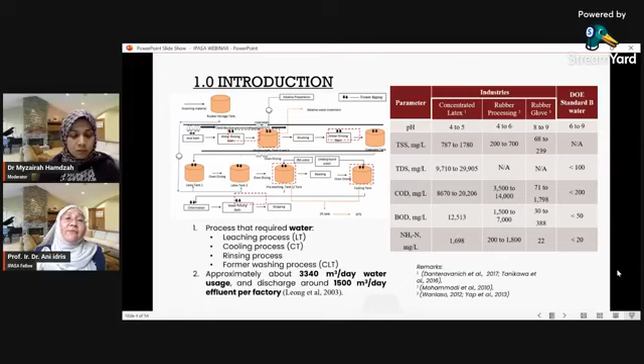Then they go for oven drying. Then they go into another latex tank for the second coating, and then only they go to the third tank here, whereby you have the pre-leaching.

In other words, they have to make sure that all the other unnecessary sensitive proteins are being leached out from the gloves, so that you will not be affected. Though some people are very sensitive to some of these proteins, they make sure it's leaching. The whole leaching process takes place, and that involves water again.

Then they go to another process of beading and so forth, and the last process also involves the rinsing of the gloves and also the dismantling of the gloves from the former.

So we can say that the process involves about 3,340 meter cube per day of water, and in fact they're discharging about 1,500 meter cube per day of water into the system. So the amount of water used is extremely huge.

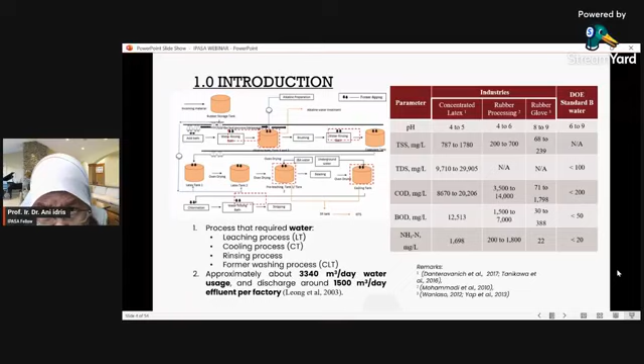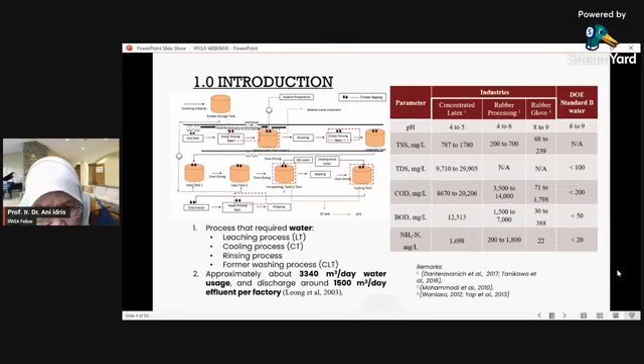And we can see here the kind of wastewater that we have from this rubber industry: the pH is about 8 to 9, and you're talking about a TSS of about close to 200, ranging 68 to 239, and the COD, which is very high, is about 1,700, and also the BOD exceeds 388.

So all these parameters have to be removed before it is discharged into the drains, so as to meet the DOE standard B. We're not talking about standard A, we're talking about standard B.

So the aim, and currently they are using the standard kind of processes used in any manufacturing process. Next slide please.

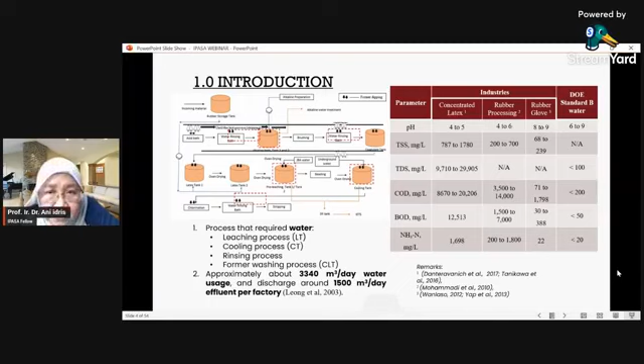Our intention here, when we go to the company to solve the problem, is to introduce to them our nanofiltration technology, which involves a nanofiltration membrane that is very capable of removing all the proteins and all the other particles. And then what we get here is the clean water.

So you have this effluent here, it passes through the membrane, and then you get clean water down here.

And as we know, most membrane systems are very energy efficient. They're eco-friendly, they are time-saving, can be operated easily, have high rejection rates of small molecules, and produce very clean water. But the challenge here lies in the prevention of fouling onto the membrane, and that's one of the biggest challenges we actually have to solve.

Because they have tried using an ultrafiltration membrane, whereby the filtration only runs for about 8 minutes, and then they have to do backwash for 30 minutes, and they have to repeat the whole cycle again.

And they actually tried to put a screening process before the ultrafiltration process, but basically even the screeners get clogged after some time. So the problem now is that even if our nanofiltration works, another great challenge is to remove the latex before entering the nanofiltration membrane.

And we want to use a very simple process without using any chemicals, no coagulation process, no precipitation process. That is what we are trying to do. Okay, next slide please.

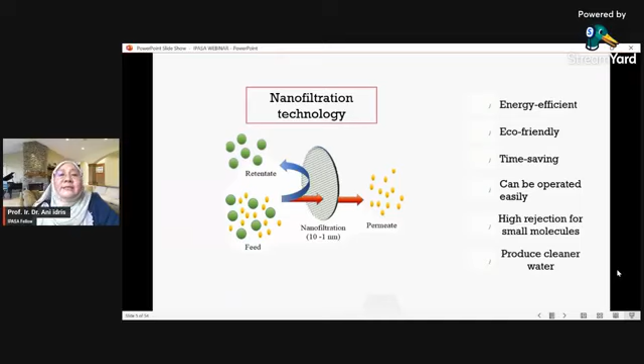So the problem statement, as we know, is that we know the problems that the wastewater produces. Basically, it's drained off, and we want to make sure that when it drains off, it meets standard B, and that some of this water can actually be used back into the process, so much so that it can even save water for the company, and also save money.

So we know that the membrane process can remove the latex, but the question now is what pre-treatment process is suitable, so much so that the latex can be removed at least 50 to 60% before entering the membrane process. So that is going to be our challenge. Next slide please.

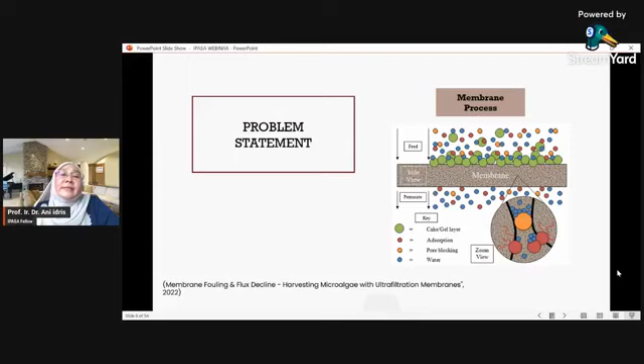Our research significance is that we wanted to come up with a pre-treatment process that is capable of producing cleaner water. It's a very simple pre-treatment process that does not use any chemicals, and we want to integrate this membrane process with the pre-treatment process.

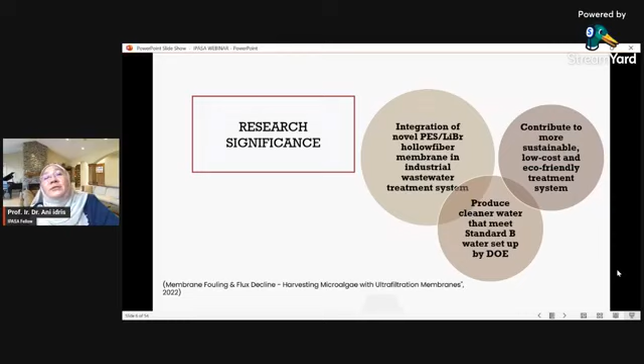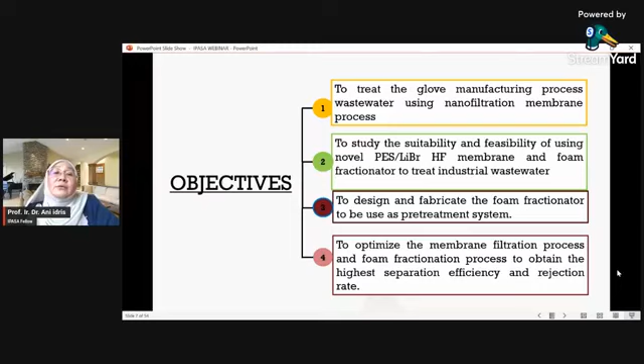Why do we want to use a foam fractionator? Because a foam fractionator involves the use of air that can carry out latex flotation using a simple flotation process that will float the latex and fine particles up onto the tower, and then you collect the clean water at the bottom of the tower. So this is our methodology.

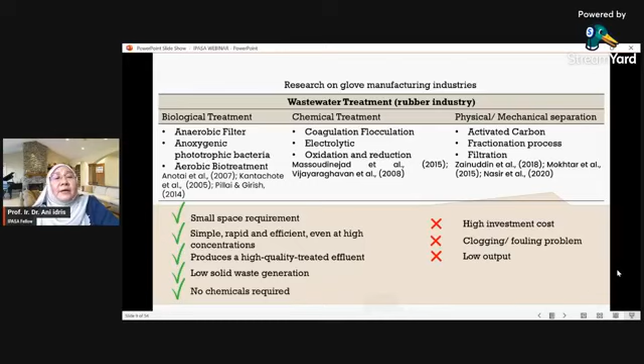I think I can omit the literature review. The current process used by most industries in the rubber industries includes coagulation, flocculation, electrolytic oxidation and reduction, activated carbon, and fractionation processes. They have a series of processes before they come to the final membrane process, and some of them don't even have a membrane process. Some use an anaerobic filter or aerobic biotreatment, but that process is very lengthy, time consuming, and involves high cost. Companies want something quick to solve the problem.

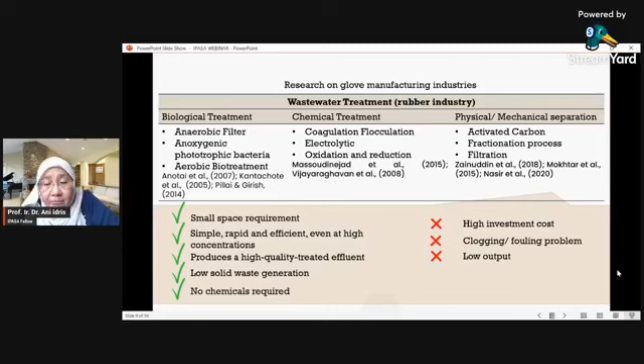We have our own hollow fiber nano membranes which we fabricated. The size is about 2.8 kilodaltons with a nano size of about 0.35 nanometers, and it's able to remove 77 to at least 80% of turbidity. It has the capability to remove about 50 to 60% of water hardness, and it's capable of reducing BOD by 70 to 80%, and also COD.

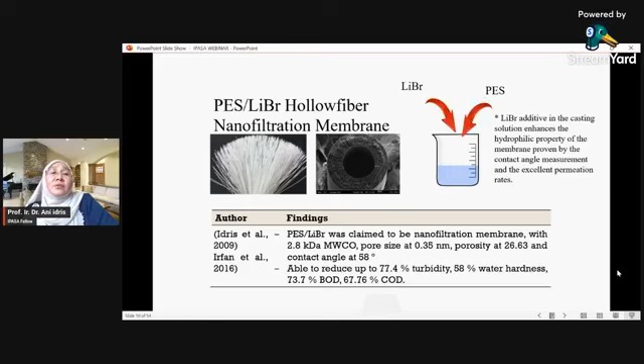Now the next thing is we are thinking of a foam fractionator. Why a foam fractionator? Because in this process we want to make sure no chemicals are added in. So what we did was pump in the feed inlet using a centrifugal micro bubbler pump. It's a very unique pump—when the feed comes in, it comes in the form of bubbles. Upon formation of these very small, minute bubbles, it collects all the latex in the feed, and the latex floats at the top.

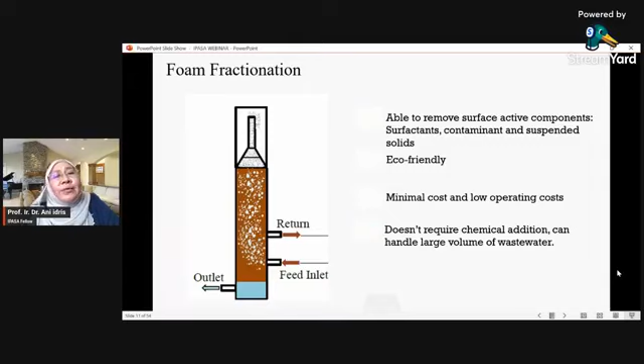In our methodology, the first part of the experiment is to get samples from the industry and use our small lab-scale systems to see whether the idea put forward works or not. In order to know whether the idea works, we have to run chemical experiments to test the water, and also check the flow rate of the water coming out, to see whether it's reasonable or not.

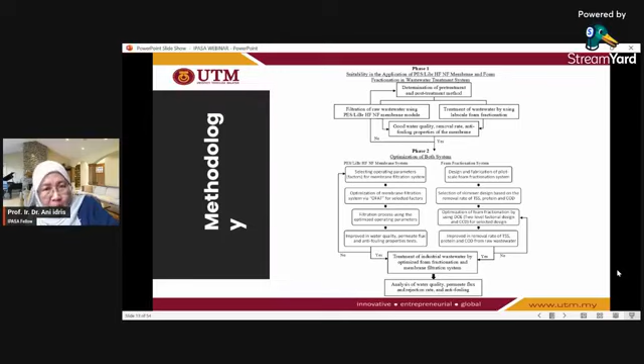If it's successful, then only do we go to the second stage of the process, whereby we optimize this small scale system, so that we can then go to the final stage of upscaling the whole system. So what I'm going to do now is explain our small system first.

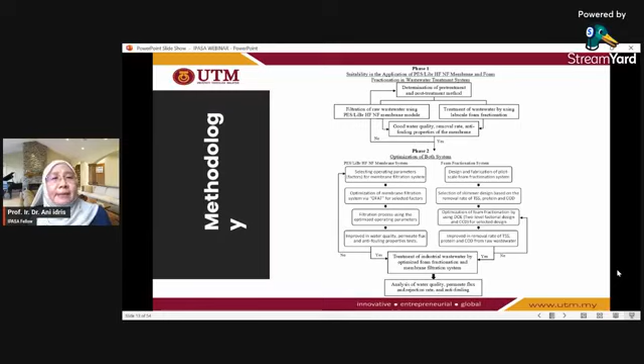But we know that if you were to use this membrane directly, it will get fouled within 30 minutes, and then we have to stop and do back washing, and repeat the whole system, which shortens the life of the membrane considerably. So what we did was fabricate a very small scale foam fractionator, about 100 centimeters in length and about 30 centimeters in diameter.

We analyze the water from every single stage of the process. We see what happens when we put the effluent directly into the membrane, what happens if we put it directly into the foam fractionator, and what happens if we combine the two systems together. That's what we did.

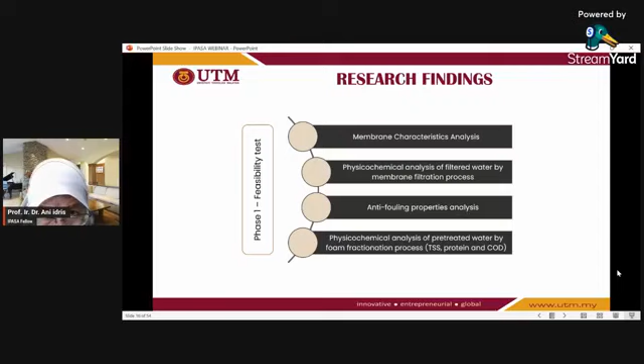Our research findings show four things we did. We characterized our membranes, because every time we fabricate them we need to characterize them to make sure they are the same size we specify. We also did a physicochemical analysis of the filtered water output from the membrane, and checked the anti-fouling properties of the membrane, whether the fouling is reversible or irreversible, and the total fouling properties.

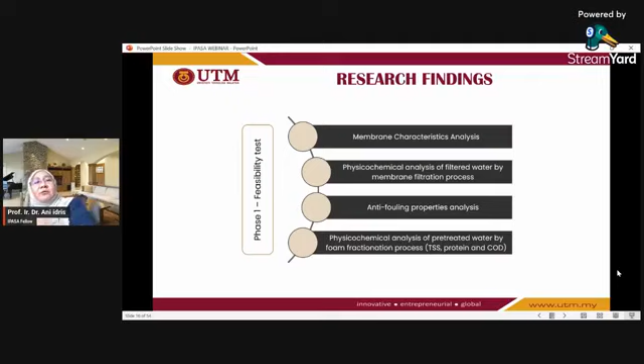We also analyzed the water we produce, one from the membrane without passing through the fractionator, and one after passing through the fractionator process.

When you talk about nano, what is the difference between nanofiltration, ultrafiltration, and microfiltration? Just a brief explanation for those not well versed with membranes: there are many materials that make membranes, we have polymeric membranes and ceramic membranes. The current system at their plant was a ceramic membrane, which fouled very easily. Our membrane is different, a hollow fiber polymeric membrane in the nanofiltration range. You might have heard of ultrafiltration and microfiltration membranes, which have a larger pore size.

Microfiltration membranes have the largest pore sizes, and ultrafiltration membranes are smaller. Nanofiltration is actually a size in between reverse osmosis and ultrafiltration. The size is not as small as RO, but it's smaller than ultrafiltration. Just an overview of membranes.

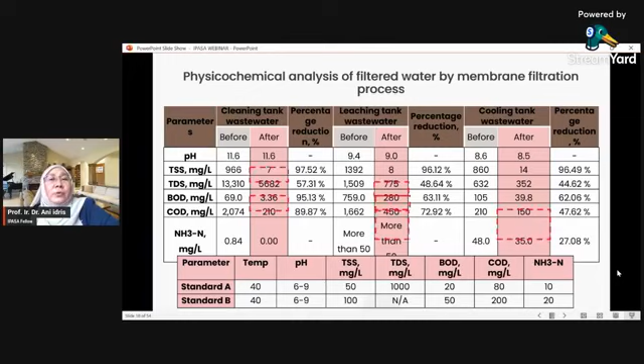Okay, so what we did is we know that if we're going to use it directly for the filtration membrane, we're going to clog the whole membrane very soon, very fast. So what we did, we are interested to find out what happened if we pre-treat the whole thing, if we use a pre-treatment process.

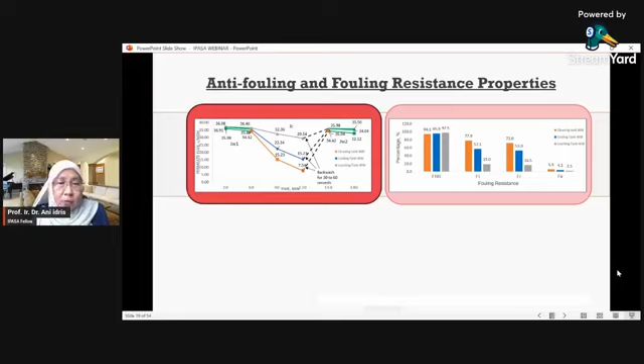So we find that this fouling process must be reduced. But this is the typical kind of results you get if you pass the effluent directly into the membrane process. So we know that we have to reduce the fouling.

So let's check onto the foam fractionator results. Next slide, please.

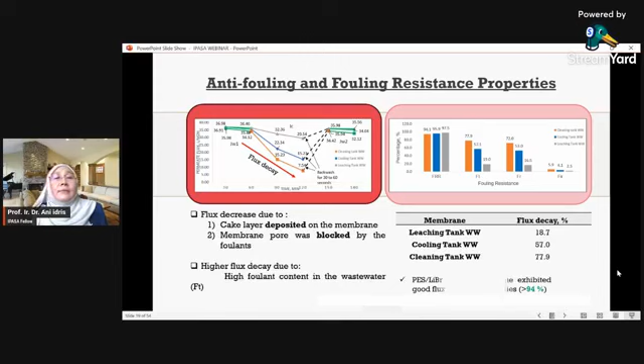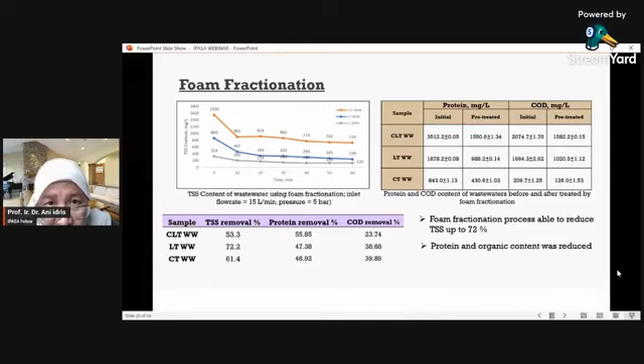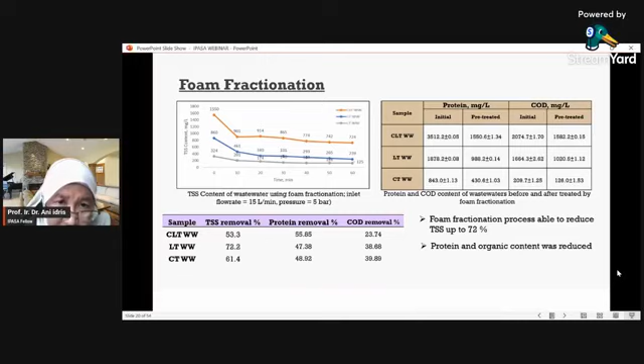These are all for the different points—different wastewater from the cleaning tank, from the leaching tank, and from the cooling tank. So you can see there is about 53% to 72% removal for the TSS, and the COD removal is about 23 to 38%. So our idea to use the foam fractionator to remove as much TSS seems to be working quite well.

So now what we do is we combine the foam fractionator and the membrane system to see what the results are like. Next slide, please.

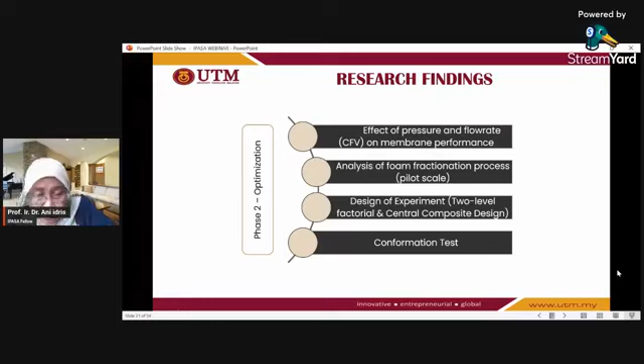So now we know that our idea of using a foam fractionator works. So what we do now is we optimize our foam fractionator, by varying the pressure and the flow rate, and then we also analyze our foam fractionator process. We make some adjustments to the foam fractionator in terms of the water inlet point and the water outlet point. So we do some design of experiments, statistical analysis, to actually optimize our foam fractionator.

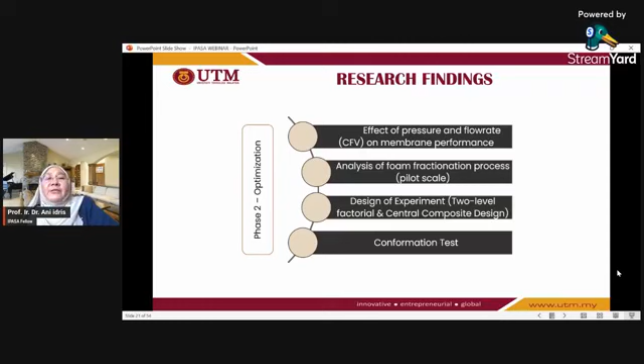Next slide, please. And of course, we measure the effect of pressure also. So these are some of the parameters that we actually vary. For example, our pressure—our membrane is a low pressure membrane, so we don't actually use very high pressure. Our highest pressure is about 3 to 5 bar. We don't use anything more than 3 bar.

But we tried 5 bar. The results for 5 bar and 3 bar are not much different. So we decided that 3 bar is actually one of the best conditions to use for the membrane.

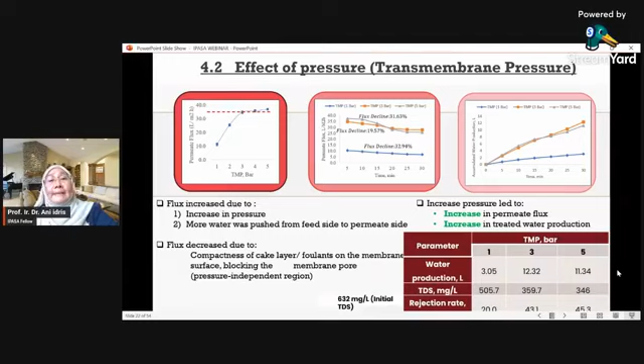Next, please. Of course, we also check on the cross flow velocity, and we vary the cross flow velocity so as to get some of the optimum points. I'm not going to go into detail as to what kind of statistical analysis we use—we use design of experiments. Next slide, please.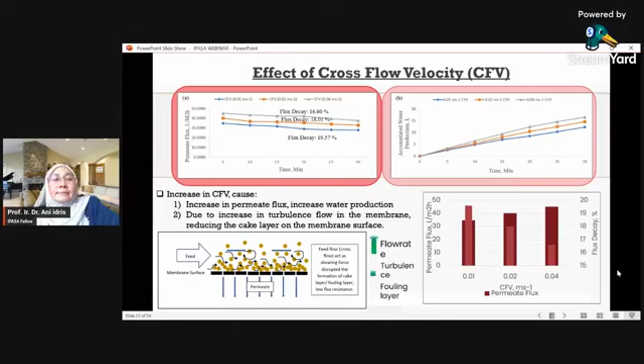And then we also optimize the foam fractionator. Next slide, please.

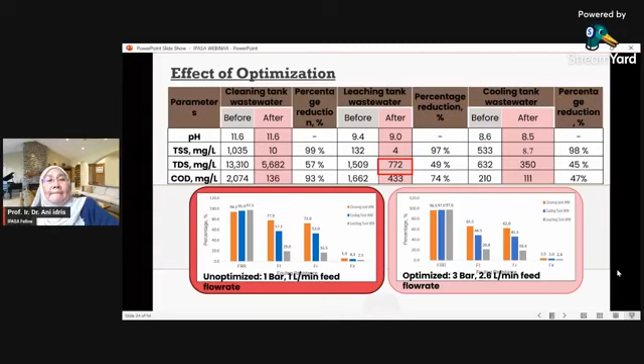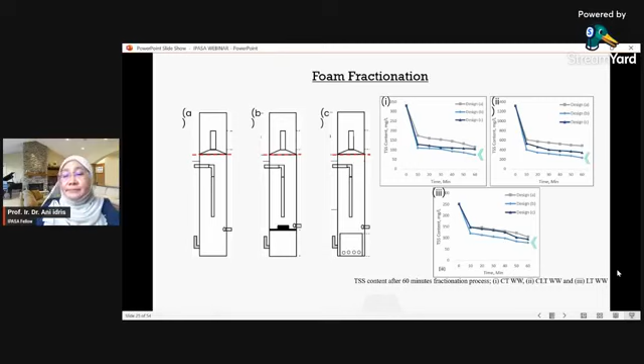So the results then, I think, of course I'm not the one who controls the slide, so it's a bit different too. Okay, as you can see here, these are the two-level factorial design. Probably we can just skip and come to the quality of the water, please.

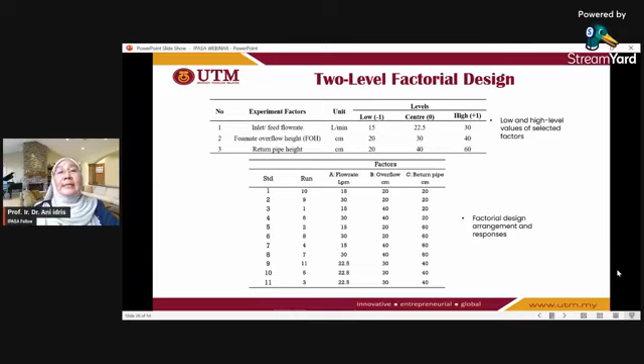As you can see here, these are the kind of parameters that we obtain when we vary all these different flow rates. Next slide. Not this one. Okay, probably next—these are the screening factors. I think we just skip this. Next slide.

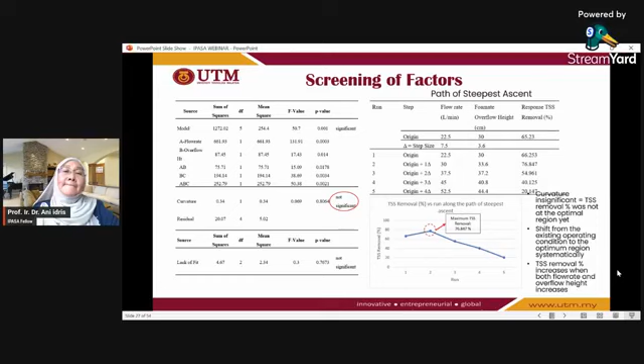Okay, I'm not going to bore you with all these optimization parameters. Just probably skip this.

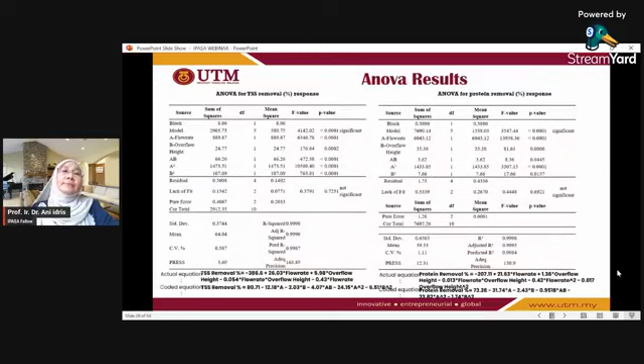So we do some optimization, and we find that we work on this region here with the maximum total suspended solids removal and the total maximum protein removal. So finally, we find out that—probably next slide.

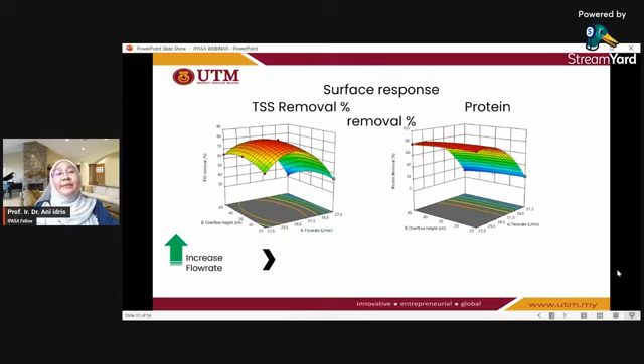So you find that by doing various optimization, we can actually improve the whole process, and we work out and find what is the best kind of inlet flow rate to use, what is the best foam overflow rate, and the height to be used. So we have actually optimized all the parameters that we use before we move on to a larger scale.

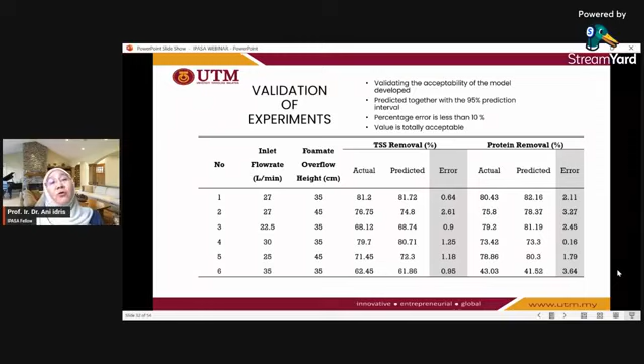And then after cleaning up, we can get back to its original condition down here. So the optimization process has actually improved the water permeation of the membrane, and also has reduced the fouling of the membrane.

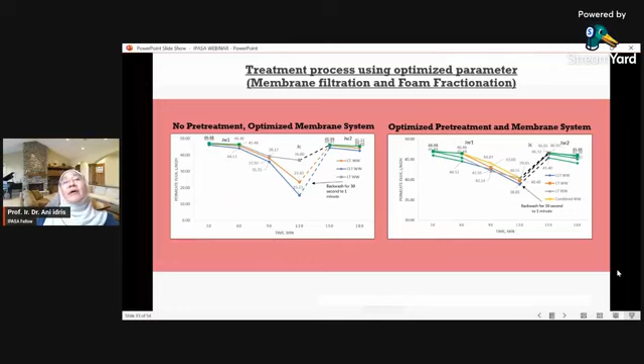Next slide, please. So you can see down here, the fouling of the membrane is very much reduced compared to without the optimization process.

Okay, and the water accumulation is in fact better than previous results. Previously it was like 14. Now, after optimization, you get a better permeate flow rate. Okay, right.

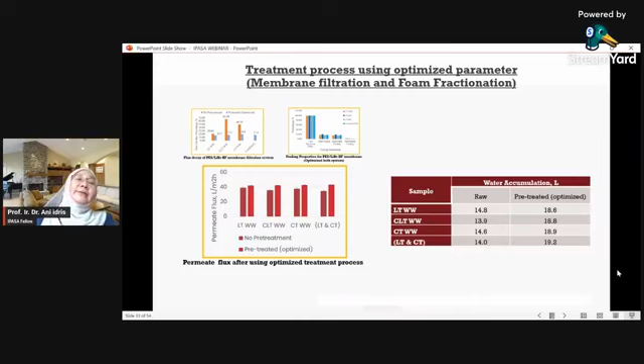So probably we can go to the slide before this one, please.

By putting in the pre-treatment as we suspected, we can reduce foulants that cause blockage on the membrane surface. We can prolong the shelf life of the membrane and maintain its performance, so there's lesser flux decay. The total amount of fouling and irreversible fouling is also reduced, giving higher permeate flux and more treated water produced.

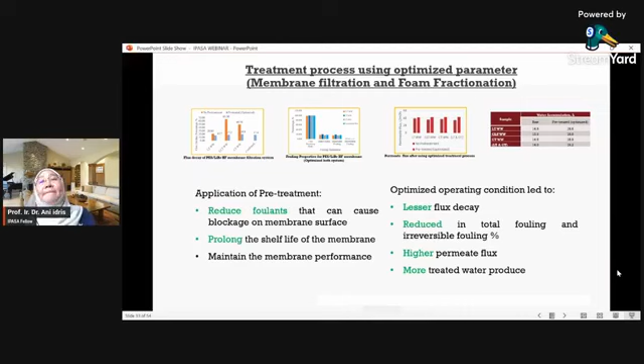Next, the physicochemical analysis of the treated water is also much improved. As you can see here, this is treated wastewater using the optimized treatment process. So we find that after pre-treatment, once the pre-treated water passes through the membrane, the fouling is much reduced.

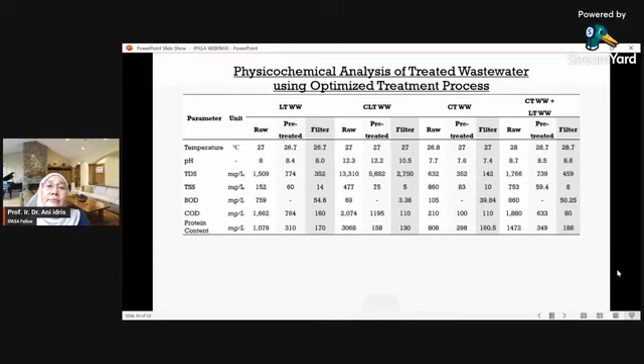The results are much better. This is pre-treatment coming out, and this is filtered. You can see that the reduction here is much better. The removal here is about 99% for TSS, BOD is about 95% removed, and 94.7% removed.

So that's for the water from the other tanks. For the cleaning tank, in fact, the removal is very good. It meets the standard - I think this is Standard A and this is Standard B. So we have met the standards for both Standard A and Standard B.

Standard B quality of the water - we have met the quality standard for both Standard A and Standard B. In fact, some of this water has had its TSS content reduced so much that we can even recycle the water back into the system.

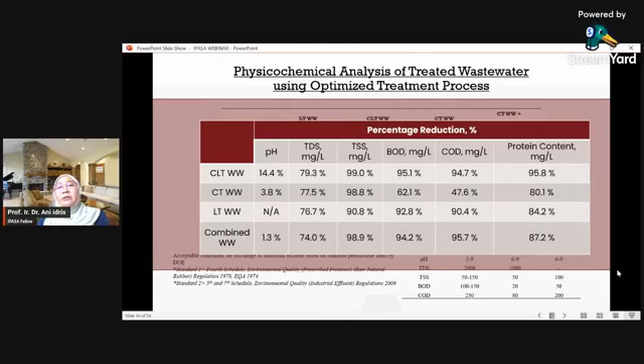So the conclusion for the small scale is that our nanofiltration membrane was able to treat the wastewater from this glove manufacturing industry, and the optimized membrane filtration was able to improve the permeate flux and water production while minimizing the flux decay throughout the filtration process - that's minimizing the fouling. I'm not saying we totally remove the foulants, but we minimize the flux decay.

And the content of the pre-treated water in terms of TSS, COD, and protein content is obviously reduced after subjecting it to such pre-treatment. Almost 81% of the TSS removal rate and 80.4% of the protein removal rate is the highest removal recorded, obtained from this foam fractionation process under the optimum condition of about 27 liters per minute feed rate and 35 centimeters foamate overflow height.

So there is very much significant improvement in the separation efficiency of the water quality obtained from the whole system under the optimum condition of 27 liters per minute flow rate and this height. So now what we do next is to upscale the whole process, and that's the interesting part. Next, please.

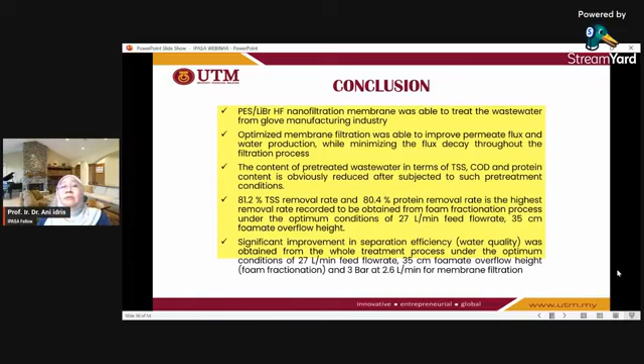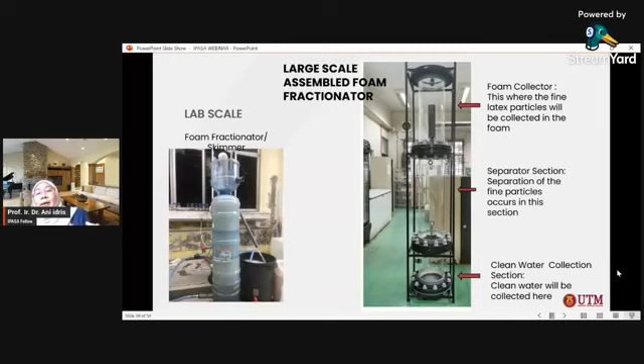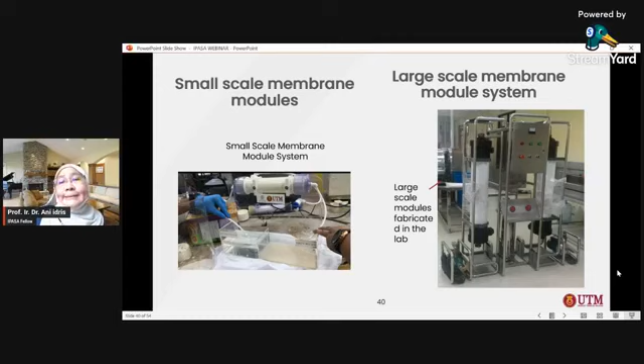So what we did was, after assembling in our plant - next slide please - after assembling, this is where we put in our foam fractionator.

I have some videos, but unfortunately I cannot show them today because I don't know what happened to my computer. But anyway, this is the feed coming into the system. This is a foam fractionation installation at the third level of the building. So before we start the whole system, we have to make sure there's no leaking between the tower sections. This is the installation process taking place.

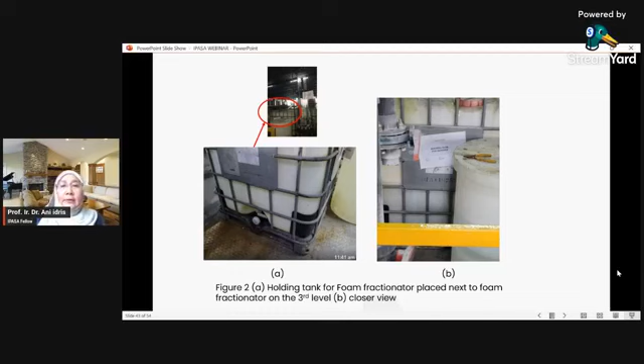Yes, I have some photographs here. Next slide. So then, of course, we have to install some tanks so the feed from this tank will be fed into the foam fractionator. We have a holding tank for the foam fractionator, placed next to the foam fractionation unit at the third level. Here's a closer view.

So working in the real environment, the real site is actually very challenging. Unlike what we do in the lab, which is very easy, now that we're in the system, we have to pump the water, the waste effluent, from the sump pit at the bottom up to the third floor, because we can only get space on the third floor.

Initially, when we handled the wastewater, it was wastewater collected from different points of the plant. But when we went on site, the company insisted that taking water from different sites would be rather difficult because space is very limited. So what they wanted us to do was to get the water from the central waste, which consists of wastewater from the leaching tank, wastewater from the cleaning tank, and other wastewater that has been mixed up in the sump pit and then pumped up to the third floor.

So we had no choice, because we wanted to see whether the whole system we are talking about actually works or not. So we basically assembled it according to what our client wants.

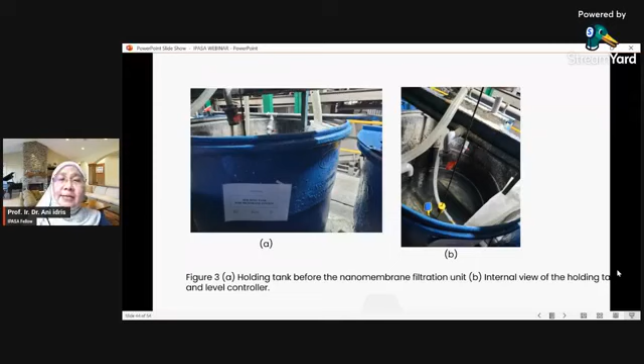Next slide, please. So we have this holding tank placed before the nanofiltration membrane. The output from the foam fractionator will be put into this holding tank, and only then will we pass it into our membrane. Next slide, please.

So this is the tank that is already ready for testing. We have a leak test done here using water in the foam fractionator, to ensure that no leaks are happening.

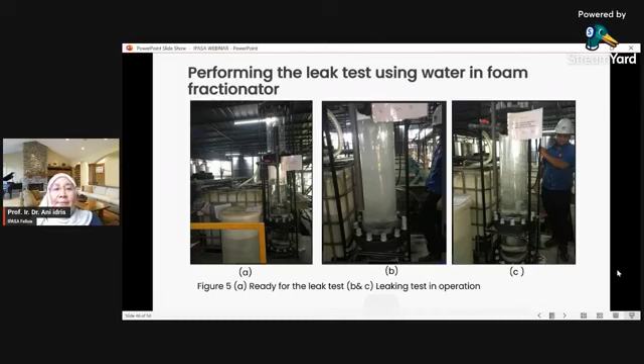Now you can see that this foam fractionator is already in operation. As you can see, when we pump in the water using a centrifugal micro bubble pump, this is where the separation takes place, because it's like milk, it's full of latex here. So this is the part where it separates out.

As you can see down here, the water feed comes in somewhere in the middle here. I can't show it very clearly—I have a video, but some other video, my slide doesn't work. But anyway, this is the feed, coming in somewhere in the center here. And then this is the separation section.

You can see the foam actually taking place at the top here, the foam formation. The top is collecting all the latex particles in the form of foam forming there, and what you see at the bottom is the clean water that has been separated from the latex. This water will then be pumped back into the holding tank down here, ready to be put into your membrane system.

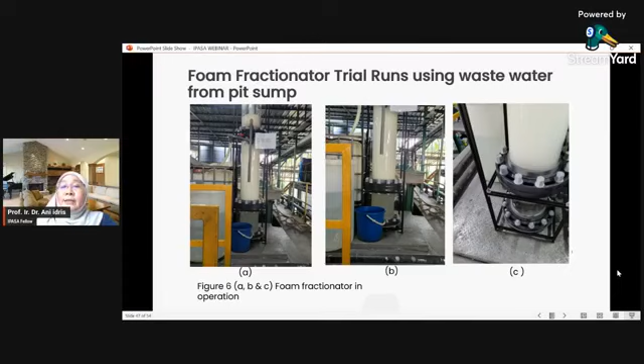Next, please. So I have some slides to show how the nanofiltration unit operates, but I don't know—because of some technical problems, I couldn't show it to you here.

And then these are some pictures of the foam, because at the top there, when you have the foam, this foam needs to be broken off before and collected. So after the whole process, we actually break the foam so that we can collect all the dirt out. The foam totally breaks after some time. Otherwise, it will cause a lot of messiness at the top. So you have to make sure this foam is actually cleaned off, and then repeat the whole process again.

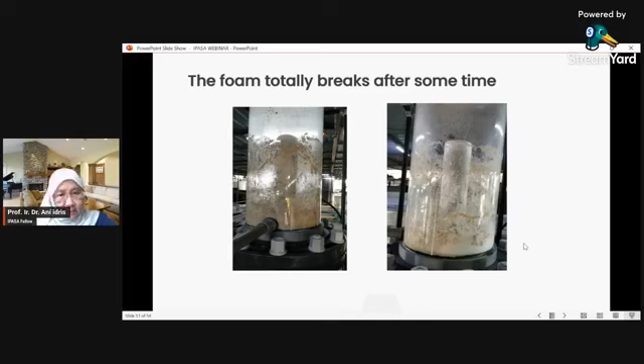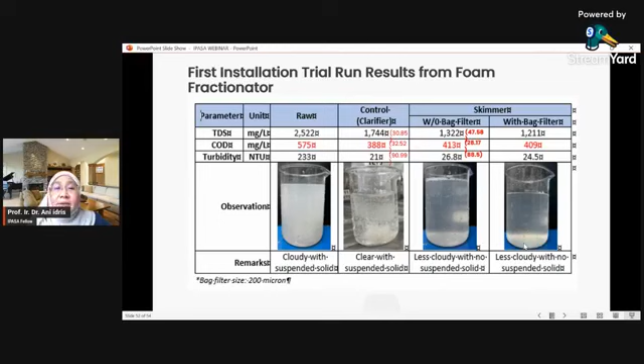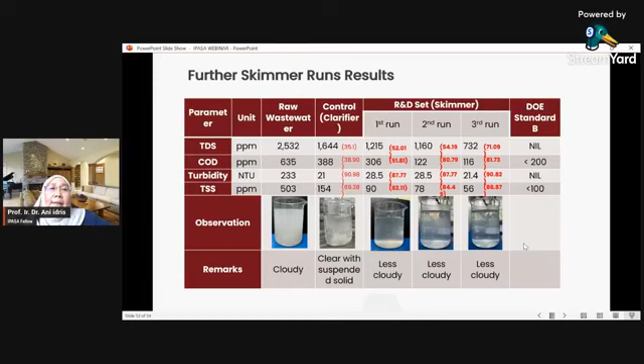Next run. So this is just from the foam fractionator, right? Next slide please. So that's it, that is the result of one of the pilot plants, we consider it as a pilot plant. It's not huge really, but the results are very, very promising, as you can see here.

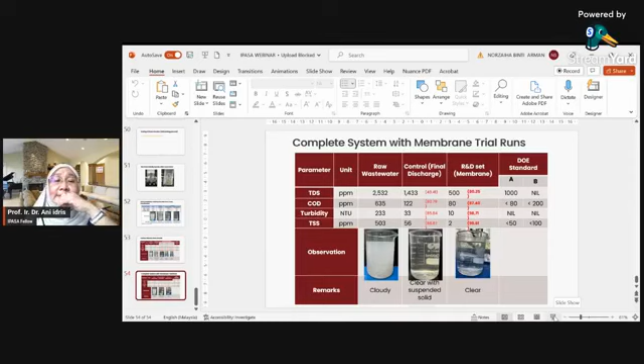I wanted, of course, to show certain slides, but unfortunately, due to technical problems, the slides cannot be seen.

Okay, there's one complete system now. Now this is another result. I think we missed this slide, the final slide. Okay, as you can see here, this is the water from the skimmer, then being fed into our membrane system. So this is the water from the skimmer, being fed to our membrane, and you can find the water that comes out from the membrane is definitely very clear.

In fact, we put in some fishes, and the fishes are actually swimming happily in the water. This water can best be recycled. So you can find here that we meet standard A, not only standard B, but also the TDS meets both standard A and standard B. As you can see here, it's less than 1,000, and the COD is less than 80, and the turbidity is 10, and the SS is less than 50.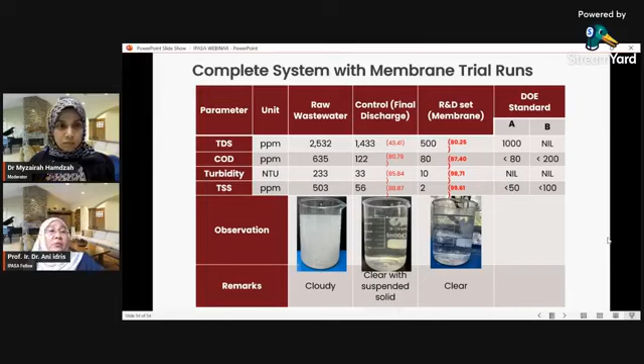So by passing it to a foam fractionator, it makes a difference. It saves the life of the membrane, and also you get extremely clean water at the end of the whole process. So that's the end of my presentation.

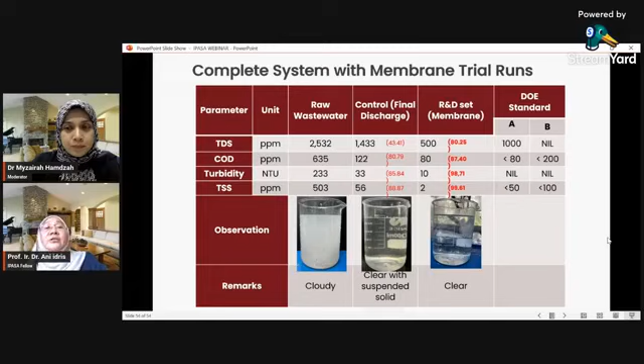His question is: how crucial is it to involve industrial inputs during the development of processes at lab scale, and if it is, what developmental factors would it help to reduce? It's a sticky question to ask.

Usually when you have industrial inputs, the first thing to do is ensure that your research project has some stand that it can solve industrial problems. So you have to go to the company and pitch whatever results you have from your previous experiments.

When I started off my research, I studied, like most researchers, on the lab scale first. They do experiments on the lab scale, hope to get very good results, and start to publish. But publication is not the end of the thing.

Once you publish the results, the next thing you ask is: is this applicable for industries? So once you're comfortable with the results, for a membrane system there are two things that are very important. One is the rejection rate of the membrane, which needs to be at least about 88 to 90%, or in fact as high as about 95%.